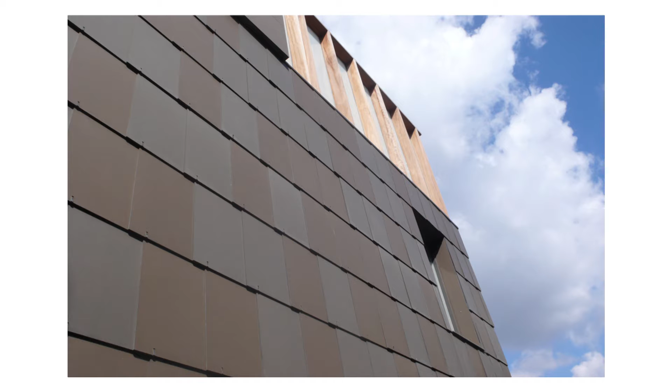Another project in London, the South London Gallery. This is a view of the Clore Education Studio, one of the core elements of their expansion. They had a great gallery, to the right, late 19th century, but nothing else. So it was about an education studio - this is it. It's like a kind of fort. It's in a very tough bit of South London, but then the whole thing opens up, and the education programme flows outside. We've just started now a new garden with an artist, Gabriel Orozco, so five years after it opened, the final bit of the puzzle coming through.

It's the ultimate art wall, and then the artist comes along and uses the other one with the fire escape sign on it. But that's sort of the life of the gallery. One of the things that's very exciting is that the gallery is the foundation, but the entire institution is really where the culture and the social life happens.

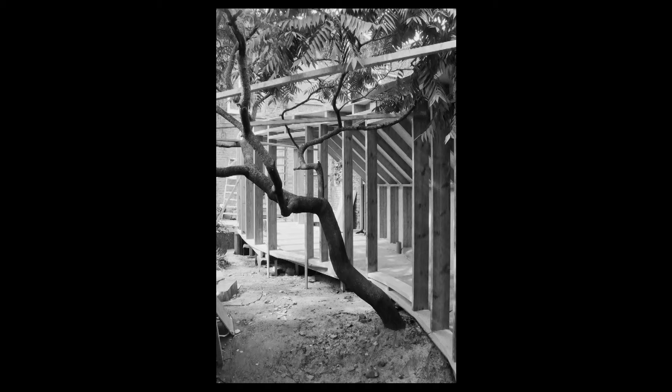Timber frame, very cheap building. She said, you can do whatever you like as long as you don't touch my mulberry tree. And so we had to bend the house around this tree, which then actually makes the character of the house. It makes it longer, so there's more ramp. And so it was a small project, but thematically important to be able to deal with all needs. That architecture may have an image, but it's about many other things too.

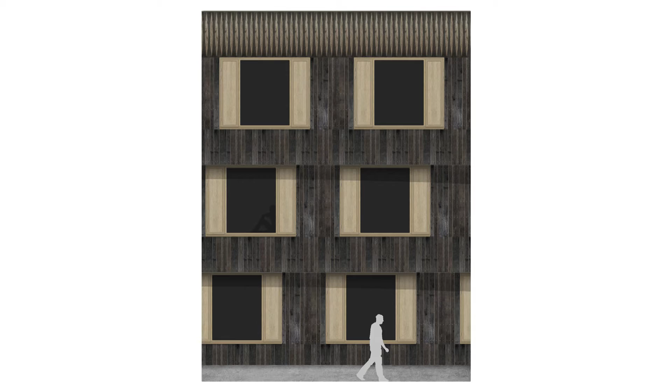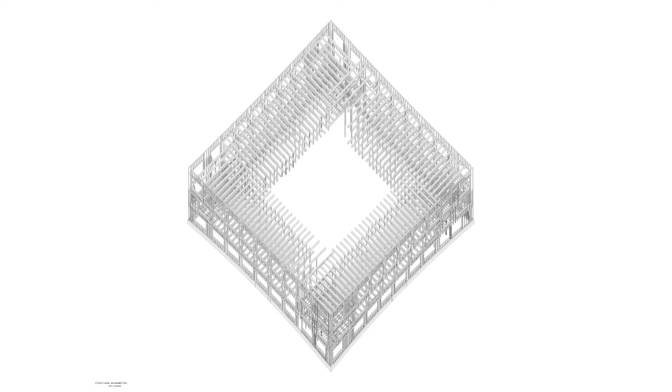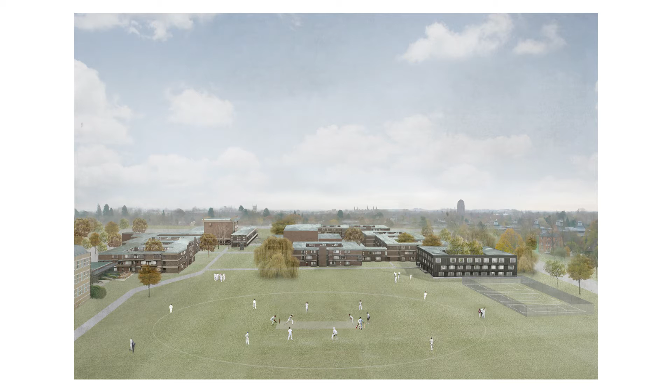Ours is full with a woodland, and well, a little bit too pale, but it's basically a square, but with very slight distortion, kind of curve on it, timber framed, and it's on the right-hand side of this image, so it's the kind of 10th court, which is then clad entirely in this reclaimed oak, and that will be finished by summer this time next year.

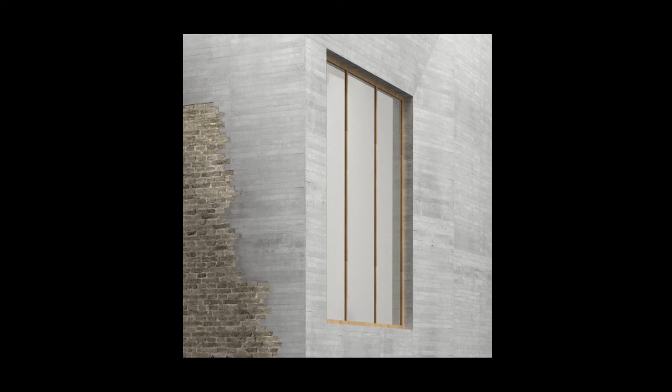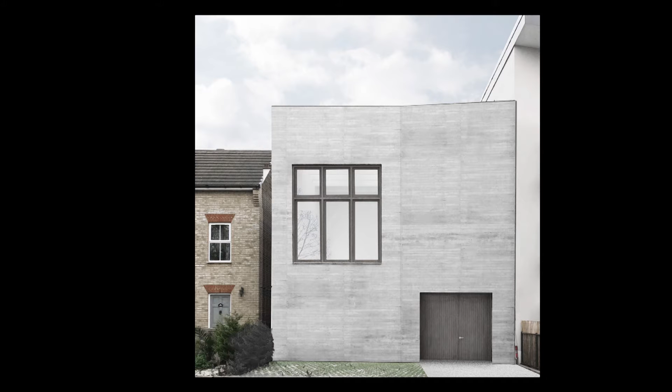And then more with concrete, this is a project that's nearly finished. Again, in the arts, it's neither a gallery nor a house, it's an artist studio for a photographer in West London, a photographer called Jürgen Teller. It's a very long, thin site, very short street elevation. The right-hand side is the street, 70 meters long and 7 meters wide, and it's effectively a series of building, garden, building, garden, building, garden, that will go from the very public to the very private, like a retreat.

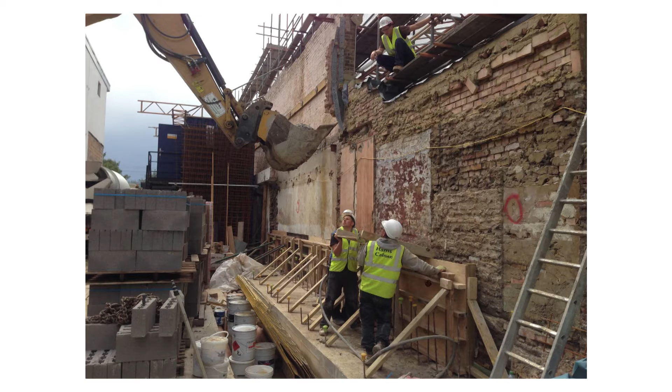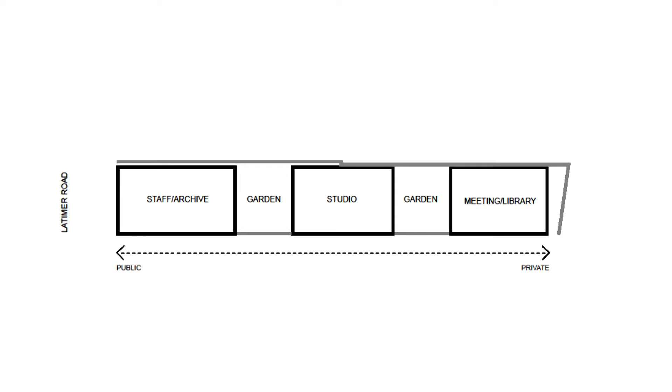But very difficult build, trying to build in between these party walls, which is why it's concrete, because that will flow more or less into every space. The quality of the building is incredibly good at the moment, so we're pleased, about 3/4 done. So it's a project that goes staff and archive buildings on the street, then a garden, then the main studio, then a garden, and then a kind of a retreat. It's like a library, there's a sauna, there's a dining room. That's the front building.

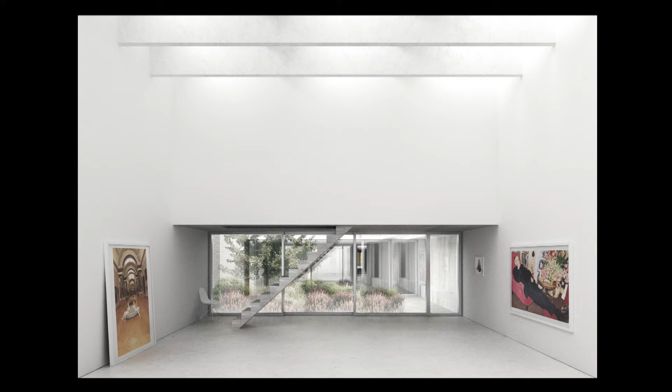That's the main studio, and so that will be absolutely full of pictures with only north light from above, and then light from the sides from the courtyard buildings. And then the gardens that Jürgen asked for were like kind of ruined gardens. They're almost like the kind of garden that you get when nobody does anything for 50 years.

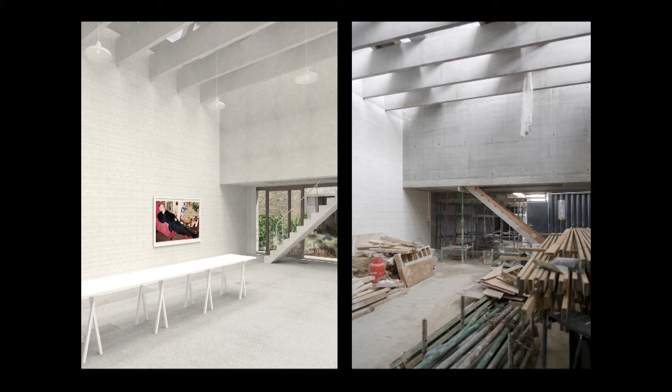And the image on the left is a rendering, the image on the right is about a month ago. So this very, very tall, double height studio space, top lit.

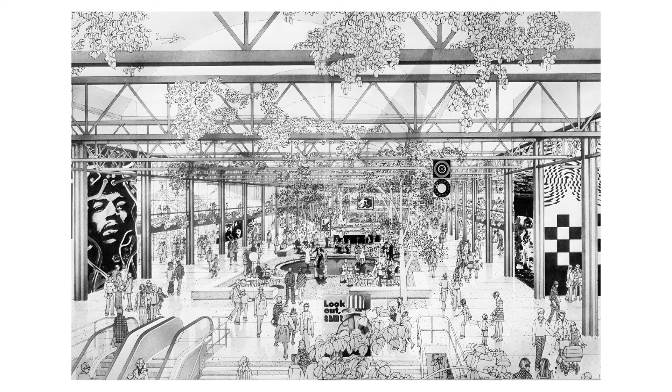And I suppose that that kind of interior brings us onto Milton Keynes, and where we're trying to go with the project. And we started with this image, which is one of the very famous Jacoby drawings of the City Club, and this idea of a kind of city landscape, interiors, the grid, the garden city, all of these things sort of spinning within a very pure idea of the city.

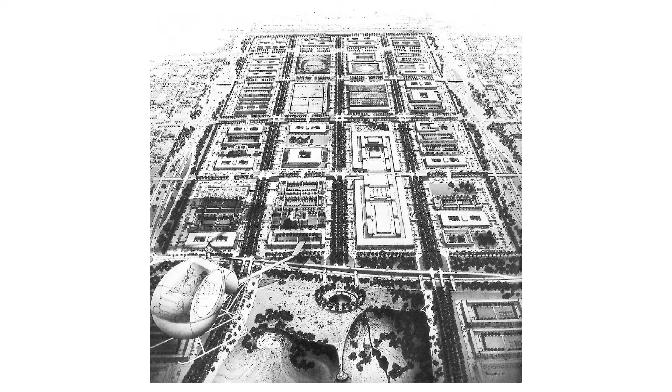And I suppose as an architect, I also teach architecture. This image, which is almost like the super icon of Milton Keynes, of this grid city laid across the Buckinghamshire landscape with a park on the end, the great boulevard down the centre, has been one of the really, really exciting things about being asked to work here. I think a lot of people in our field think it's probably one of the great set pieces of post-war planning anywhere.

And if you look at the history of the grid city, right the way back from antiquity through into neoclassicism, into Savannah in America, the great American city, and for it somehow to come back with a kind of picturesque tradition, what Gareth described as the welfare state mixed with the yellow submarine. For us, that spirit is really important.

So we start with these images, and this image of the site, which I'm sure you all know extremely well. It's a very powerful position. It's the last building before the park. It's the bit where the grid of the city meets this fantastic, almost sculpture park. And it looks on one side onto the theatre, on this side onto Midsummer Boulevard, and of course then onto the park beyond.

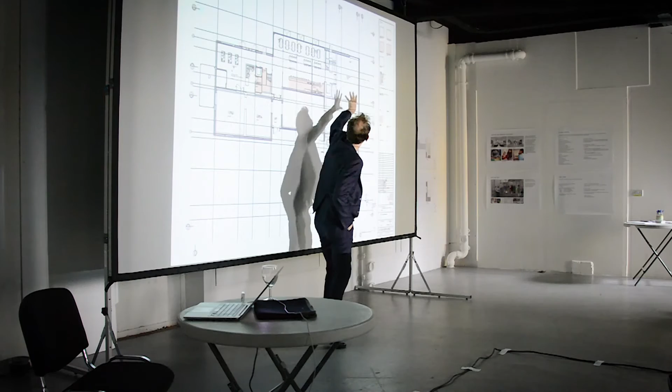Some context images, and really the expansion has evolved over the last year, but this, broadly speaking, has remained strategically always the same. We have the two existing buildings there with the three existing galleries, and then we add another building on grid, a rectangle, as rectangular as we possibly can be, at the end, in order to expand the suite of galleries with another suite here, and then to make effectively a potential circuit that starts from the entrance and ends back in the cafe.

And then on the south side, there's a new education suite, and the technical infrastructure, and above, the multi-purpose theatre auditorium that Anthony mentioned before. But I'll do a walkthrough.

So one of the things, which is a simple thing, but I think an important one, is we're retaining the entrance where it is, so it's shared and visible with the theatre, but taking away the slightly strange screen there. If you don't know, have a look when you come out. And then making it a much more Milton Keynesian entrance, which is the very famous porte cochere. This great symbol of the city, almost a residual roof on four legs. So that's the first part.

And the second element is this window, cutting a window on the right into the first gallery, which then aligns with every opening all the way through the new galleries, and coming out at the other end. So at the moment, the entrance to the second gallery is here. You've got a blockwork wall, with a screen on it at the moment. So from here, as you walk to and from the theatre, you can actually see the whole thing, with a window out the back at the end.

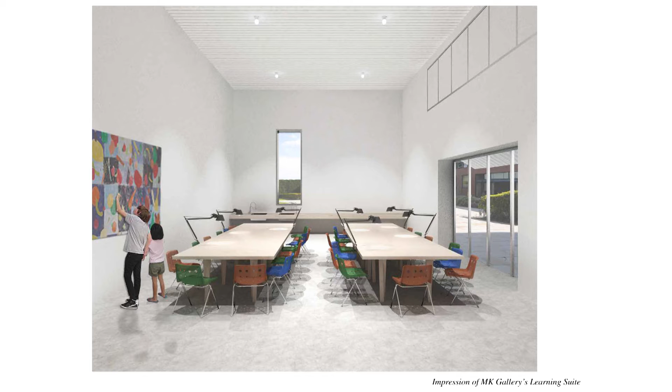The first floor, you could say, is more or less the technical floor. It's the kitchens for the cafe, it's workshop storage, and then plenty of loos, and then there's the learning room, which is an existing space at the moment. And so a very technical floor, but one that needs to be really accessible, really functional, and also there's no reason why it shouldn't be really elegant too.

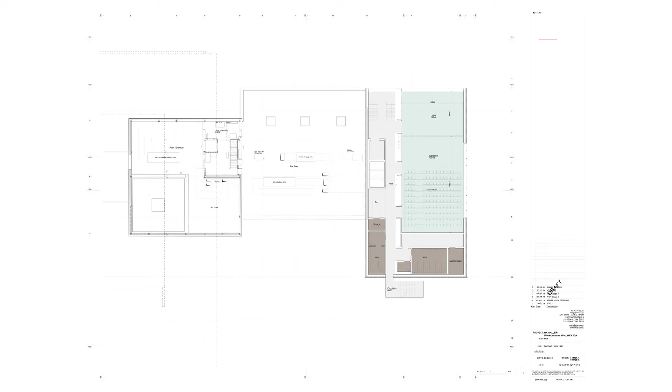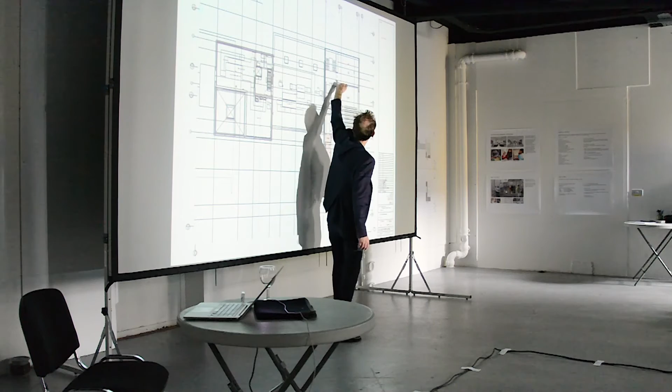The second floor, or you could say the first floor of the new building, this is the new building here, is essentially one very, very large room with retractable seating here, which can go out for about 150 people in the seating mode and about 300 or possibly more in the retracted mode. And then with an opening screen here, so it can actually be the total first floor, or it can be separated out as a room for hire and performance space for different situations.

And then really it's about a view out onto the street and the city from high level there, and then a huge one to the east over Campbell Park. And then some of the technical backup, loos and lifts and those kind of elements.

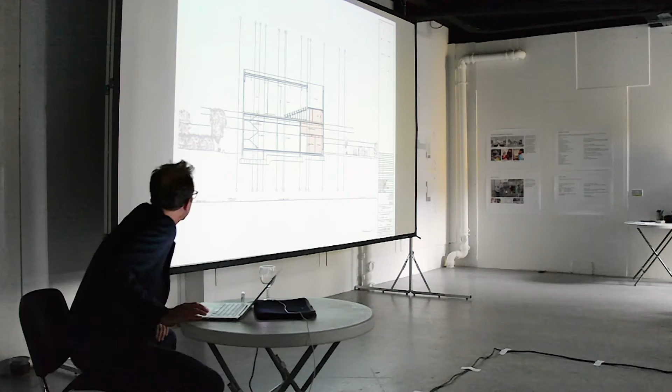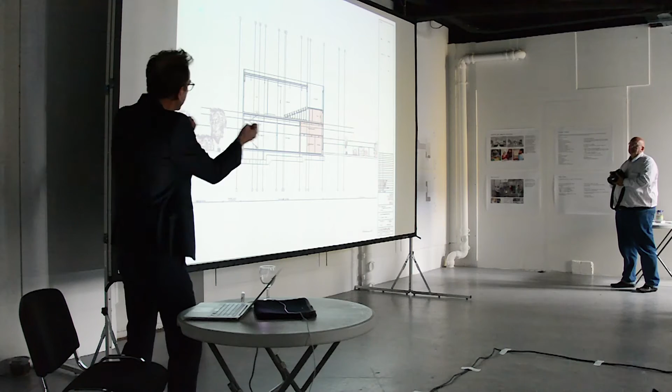So in section, this is the new gallery, two new galleries. This is on the boulevard, and this is that new space. So it's a big hall. Hopefully it'll be great for cinema, talks, concerts, performances, either separate or all together as one hall. And as Anthony described, a space that could really have a very wide programme and type of environment as well, depending on how it's divided and the furniture is arranged, from the quite traditional to almost a kind of Kunsthalle at the other extreme.

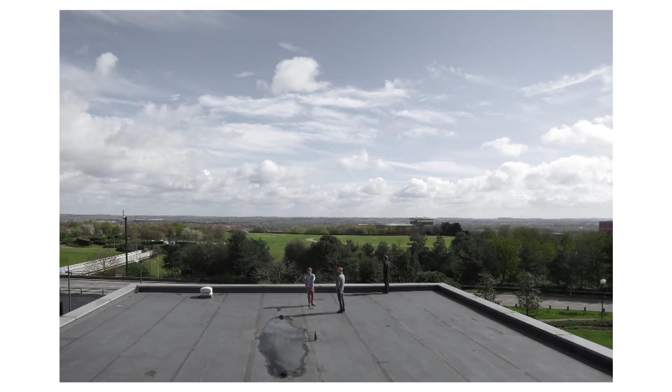And then this view, which unfortunately you can only get if Simon very kindly escorts you onto the roof of the building, but it's absolutely spectacular. I mean, it's a really great moment where the city somehow opens up to the park.

I think that Campbell Park is, there have been very few really good parks built in the 20th century in England. And I think this is one of them, sort of mid-century modernism with great geometry as well as naturalised landscapes, a sort of latter-day picturesque.

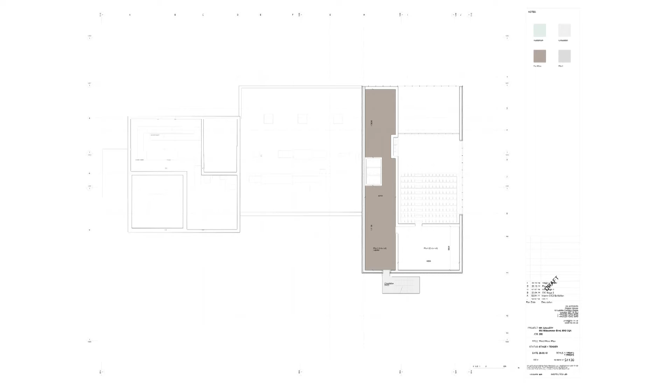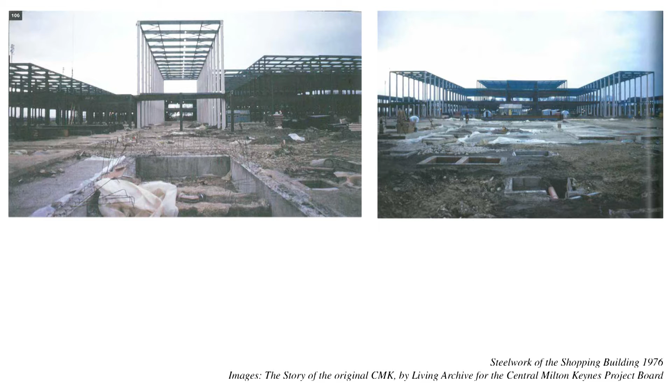Hopefully that will be a really central part of that top room. Materially, the building, I hope again, will be Milton Keynesian in its spirit. It's going to be steel frame, partly for its economy, but partly because of the elegant rationalism that underpins the best buildings in Milton Keynes. Repetitive steel frame, which will then be clad in stainless steel.

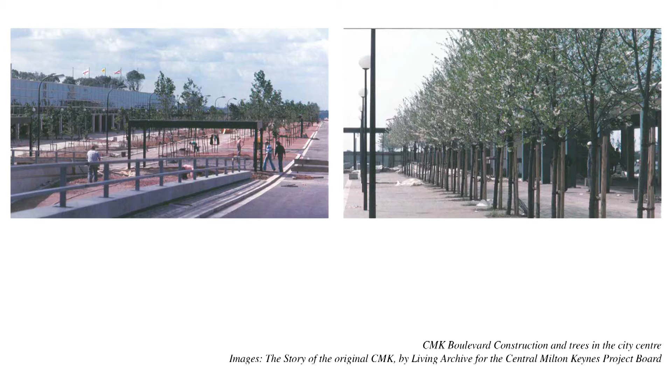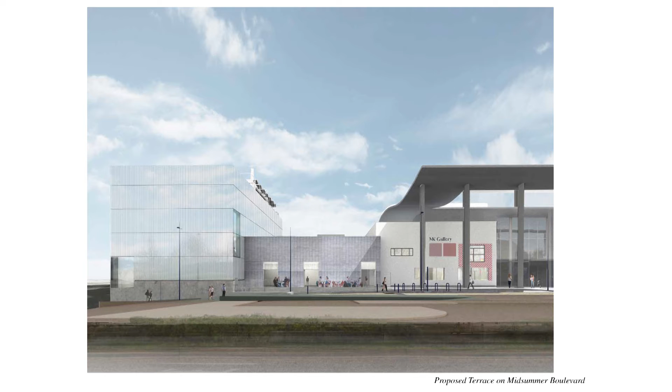So there will be a sort of grid. I'm afraid these are very bleached out. They're sort of there on my screen. They're not much more detailed, but effectively that wall is in polished stainless steel with the grid, I suppose, marked out. There will also be a vertical grid.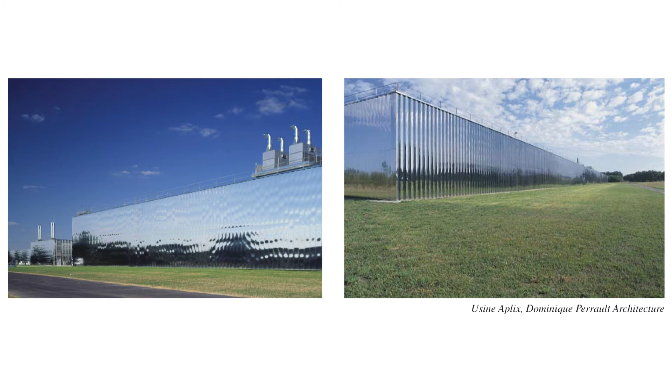Initially we were thinking of doing it in polished aluminium, a little bit like the Louvre in Lens, the new one that opened about a year and a half ago. But the price of metalwork and commodities means that more recently, stainless steel is now cheaper than aluminium, which is fantastic. And this is a building in France with the use of polished stainless. It's very responsive to the colour of the sky, the surrounding trees and things like that. So this is a few months ago, and it's moved on since.

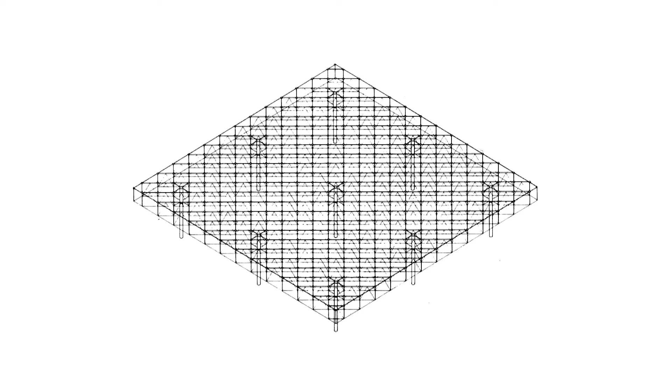We've also been looking at some of the iconic structures of Milton Keynes. This is one of the great drawings that's part of the story of the city, which is the space frame, the space frame being the architectural version of the city grid. Again, it's rather bleached out, but this is one of the versions of the sky room, where the top room is all glazed and would have a steel space frame, so that the expression of the building is very much the spirit of the city. And that's where we are at now.

So at the moment we're trying to consolidate all these things and make sure they work with the budget, make sure they work with the program. But I think at the last review, it's all on track, and we hope to get the feedback and then take it to the next bit to build next year. Thank you.

Really sorry that we have to be doing this on our projector. If you do want to see better images of them, we do have those available. Does anyone have any questions or comments?

Thanks. Very, very nice scheme, given its history of fundraising. I think it's not lost anything in its scheme. Maybe in fact gained some things really. Just a couple of questions on multi-purpose. Obviously, I'm coming from the cinema side of things. How do you get into the multi-purpose space?

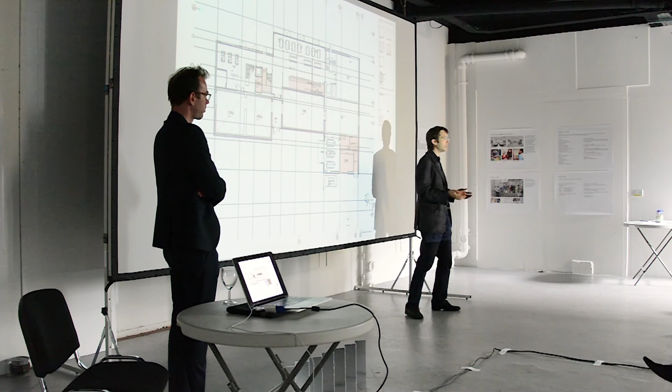What about this part here? This building? Yeah. So this building upstairs will be offices for gallery staff. Okay. And the ground floor will, at the moment, continue to be a project space. As you know, the end of the building is used for monthly exhibitions of community related projects. And in here we do all sorts of events. At the moment we have our parent and toddler sessions, we also have our talks and screenings and concerts.

We hope to keep using it for programming. Anyone who came to our opening, I think it's 2 weeks ago now, will have seen that we've run out of space and need larger facilities. I think we had about 600 people that night, and if we can continue drawing those kinds of crowds, we'll need as much space as we can get.